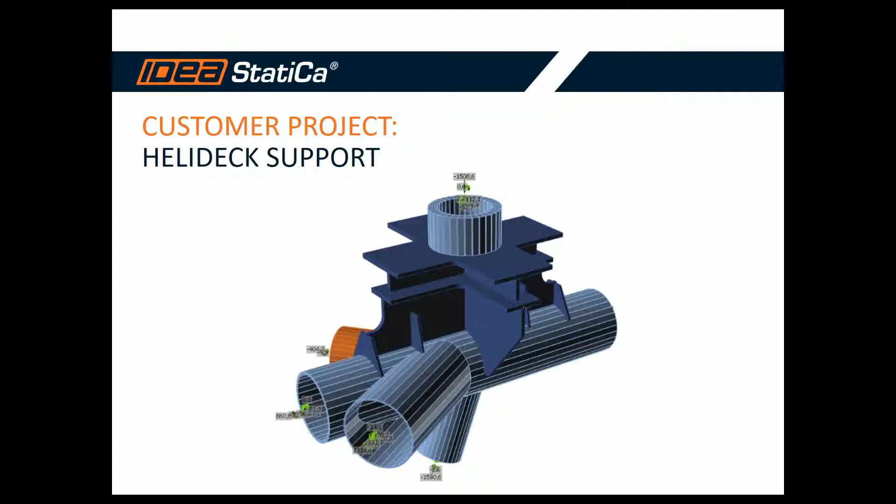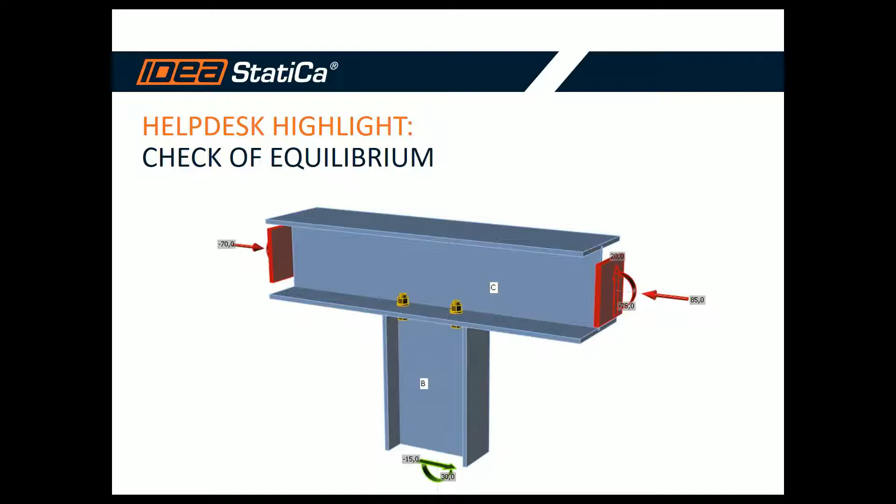So for today, we prepared one customer project that's about a helideck support, this kind of joint. So Lukáš will be presenting you this job. And then about the HelpDesk highlight that we collect on our HelpDesk and process them, help customers to deal with problems. This is one thing about making clear the equilibrium check, if to turn it on or off in the load effects and what are the reasons. This is a very common question in our help desk, so this is why we want to clarify that.

So let's get to the helideck project. This is a project that we got from one of our customers from Italy, who was doing the part of design, the structure analysis of the steel structure. So this helideck is right now still under the design process. It's built by Bayard, and it's a helideck on an offshore structure. So it's made of an aluminium deck and supported by a steel structure, of which part is the steel joint designed in IDEA StatiCa. Diameter of helideck is 23 meters and it's designed for the helicopter AgustaWestland. So that's a very interesting thing.

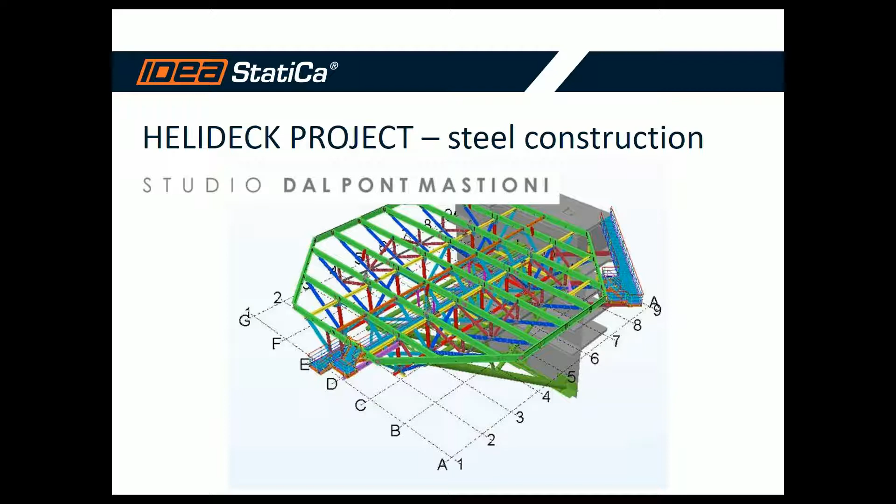This is a Tekla project drawing of the whole thing, together the aluminium part and the steel structure below supporting it. And the Italian office is called Studio Dal Pont Mastioni, and they did the calculation and analysis of the steel structure and all the joints of the steel structure in IDEA StatiCa. Their workflow was, let's say, the nowadays BIM workflow. So they had the drawing of the project in Tekla Structures, then they did the structure analysis in STAAD.Pro, and they exported those models into IDEA StatiCa, where they code checked the steel joints. So nice example of a workflow. This is how we would like to do it.

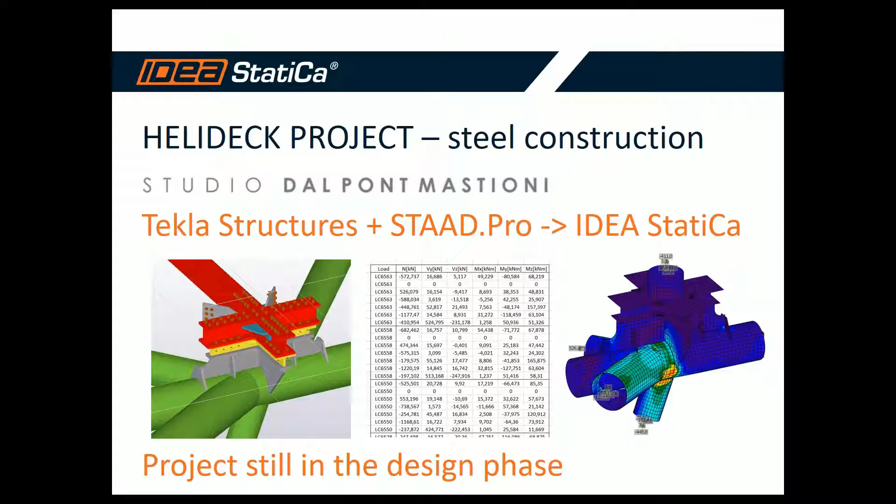And while the project is still in the design phase, we were not able to collect or to show you and to work with the real data. So we have some restrictions, but we'll do our best to show you as much as we can. So now I'll give the presenter to Lukáš, and he'll tell you more and show you part of the workflow.

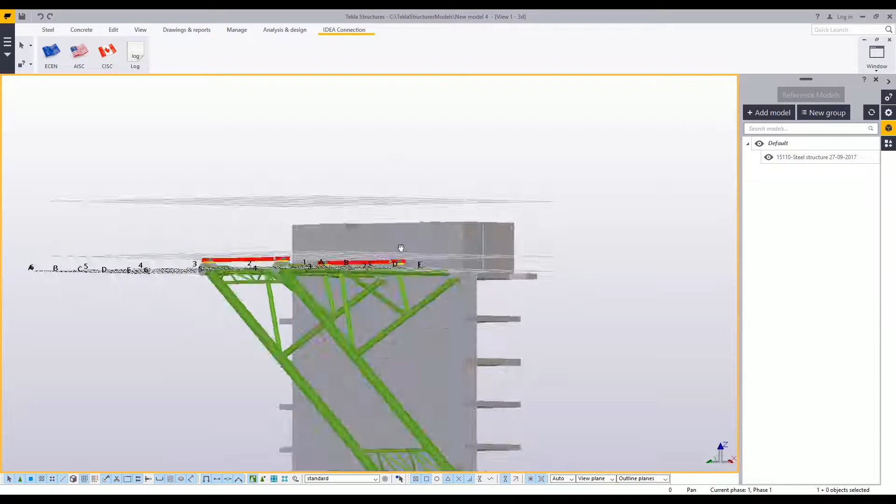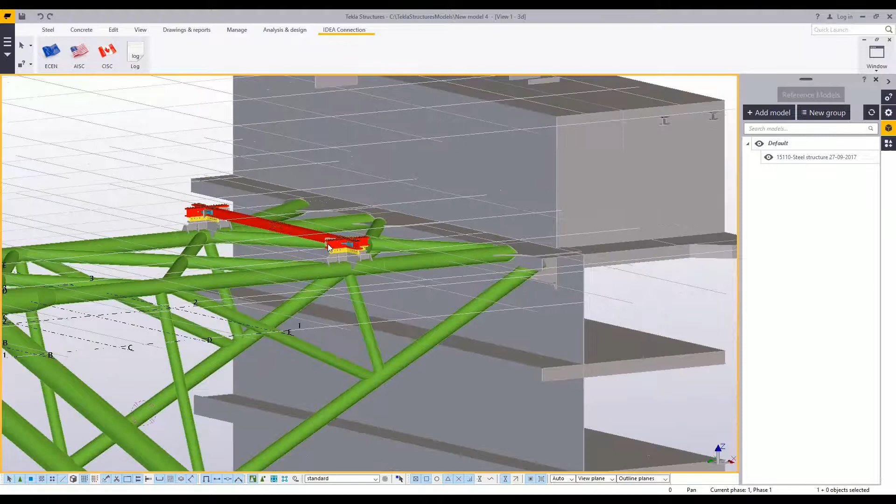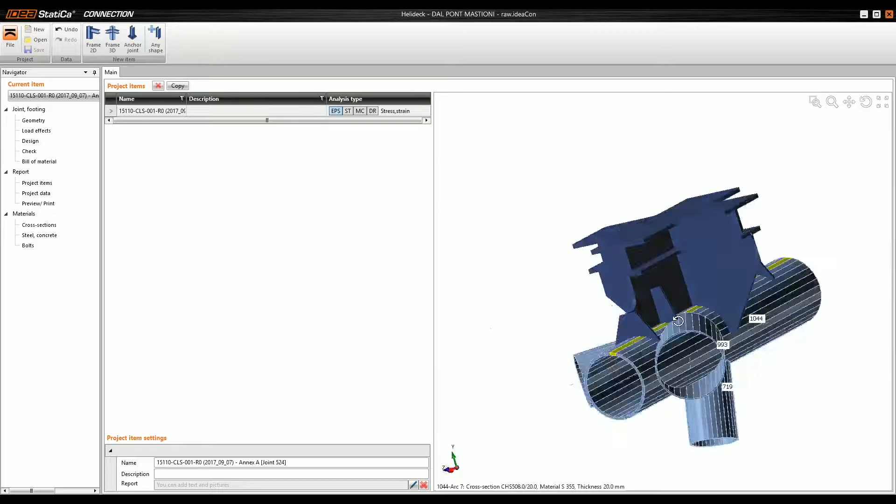So, as Adam said, now you can see only the steel truss cantilever, which is composed from the tubes, and I would like to check this joint. As Adam said, I don't have permission to make the process of the export from Tekla Structures because the project is still in the process, so we don't have permission for that. But we have received a project of the exported joint in IDEA. So I will show you the exported geometry of the joint, which is composed from the tubes or members and from the plates. These are, I can say, stiffening members.

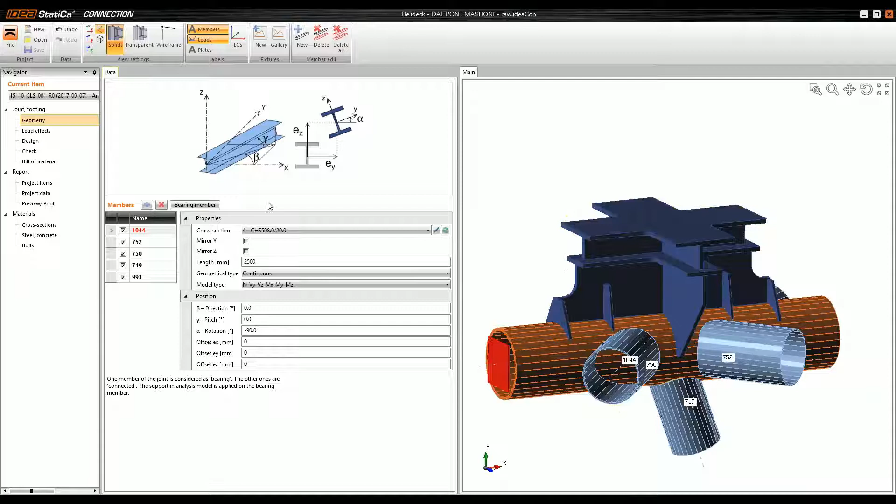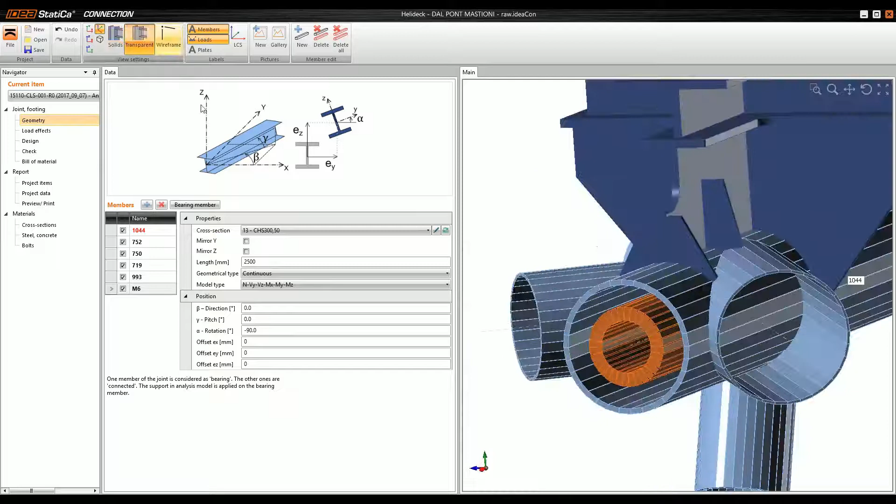Okay, if we have geometry, we need to transfer the load from the upper part of the helideck to the other parts of the tubes, but we need to arrange the load through the stiffening member, which will be added on the upper part of these cross plates. Yes, so I create a new member. You can see the member will be the tube. The diameter of the tube will be 300 millimeters and the thickness 50 millimeters. Now you can see the tube. I will just switch on the transparent view to see the tube, and I change the length of the tube to 300 millimeters and inclined about 90 degrees.

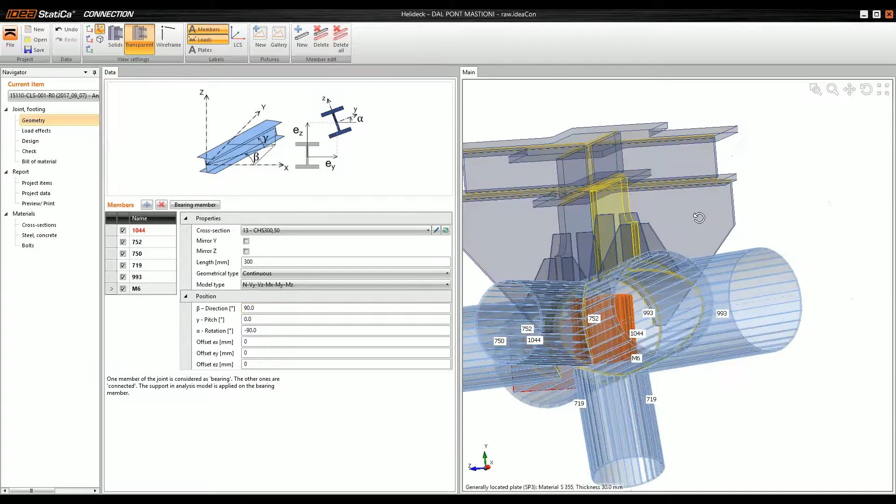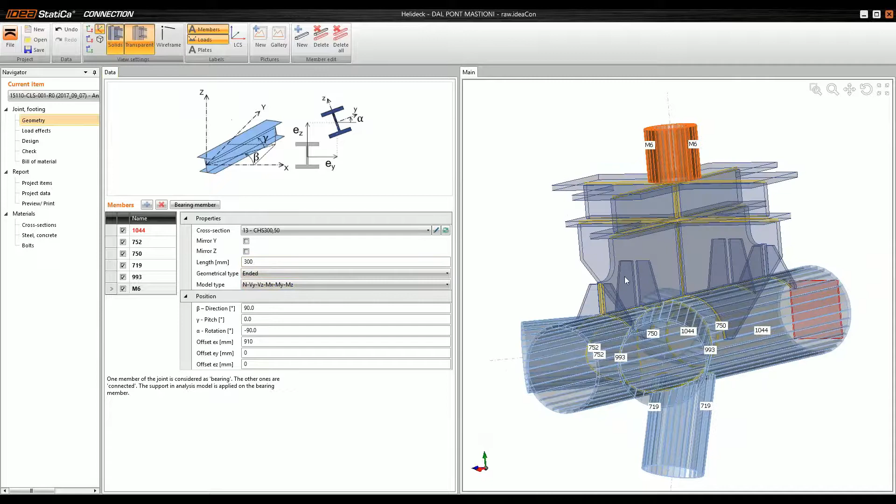Okay, and the last step, I need to move this tube to the upper part of this cross plate, about 910 millimeters. And I need to change the geometrical type on the end. Okay. Now you can see I have a stiffening member which will transfer the load from the helideck to the steel structure, or to the steel joint, which I would like to check.

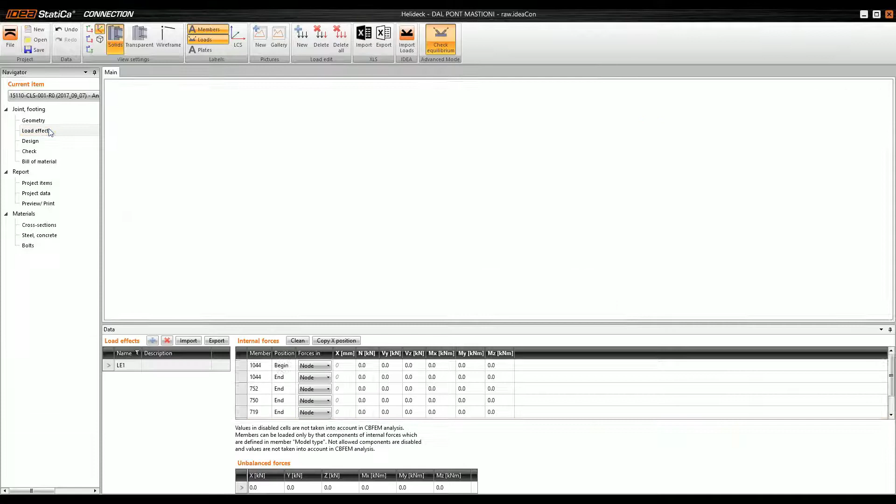Okay, so now I will continue to the load effects. And in the load effects, because we have received internal forces from STAAD.Pro, I will import the load cases from the Excel sheet. Here you can see many load cases or load combinations which I would like to check, but to speed up, I will pick only one. For example, only this combination.

This one, and I will perform only copy and paste to this step and give OK. And you can see the internal forces were automatically uploaded from the Excel sheet to the relevant members.

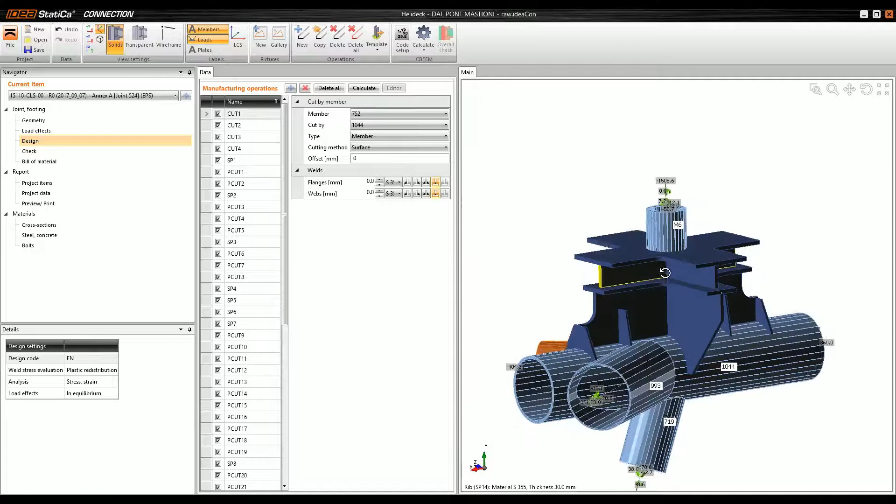Now I can go immediately to the design, and in the design I need only fix this bottom part of the tube to this cross plate. So I will use the manufacturing operation weld or contact. I would like to make a weld in this bottom place. The member is member M6, so I will choose member M6, and the plate, this is the plate SP14.

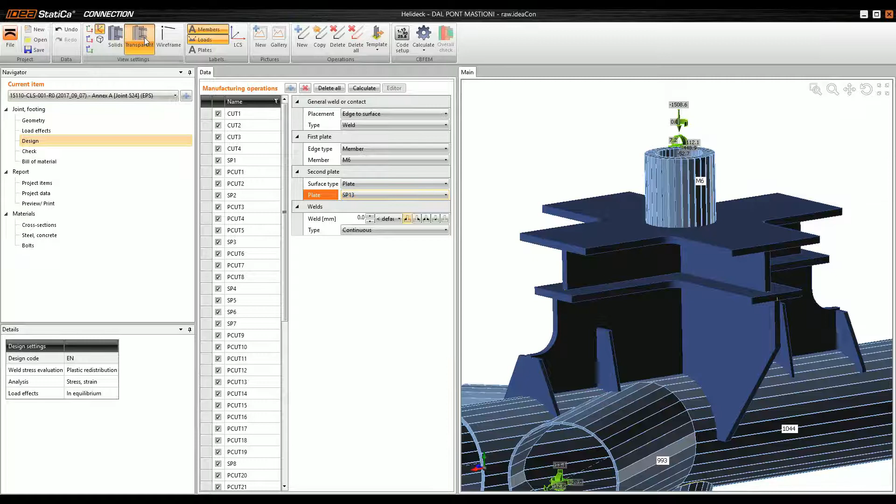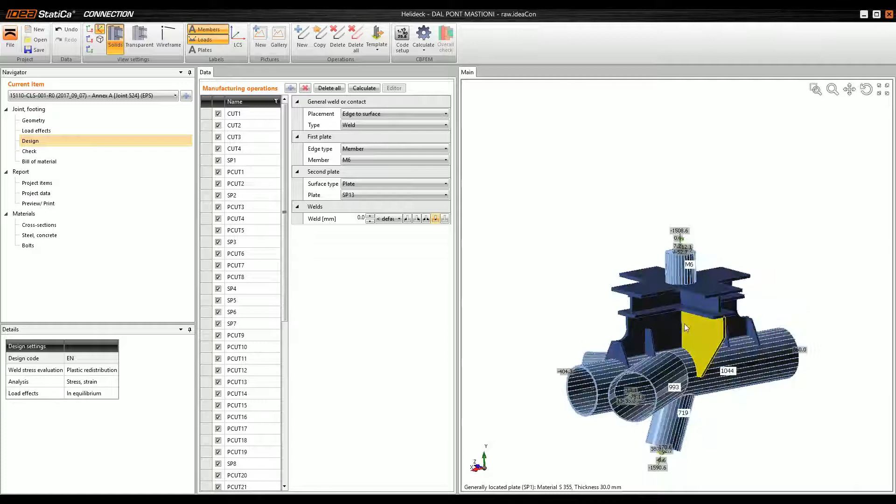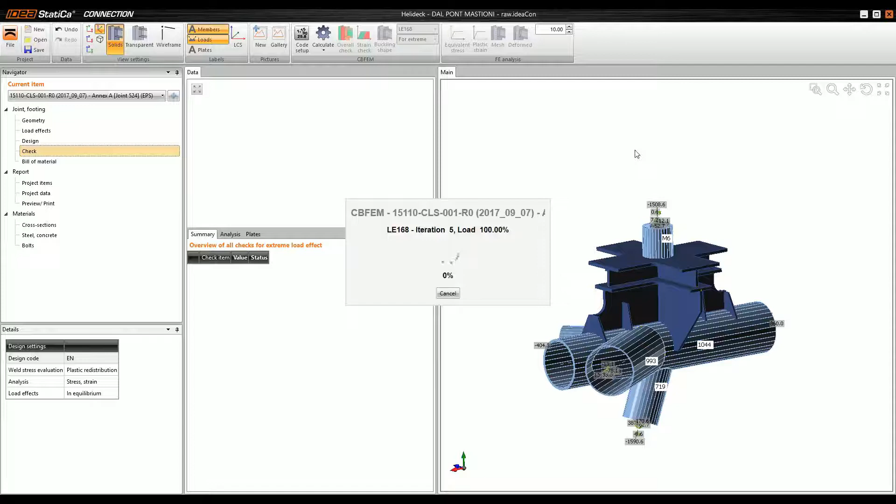And if I give a transparent view and switch on the butt weld, you can see the weld was created around the circumference of the tube. Now I have finished the modeling, because the operations were automatically exported from Tekla to IDEA. You can see there are many manufacturing operations in this joint, and I can run a nonlinear analysis. It will take a few seconds because it's a difficult type of joint.

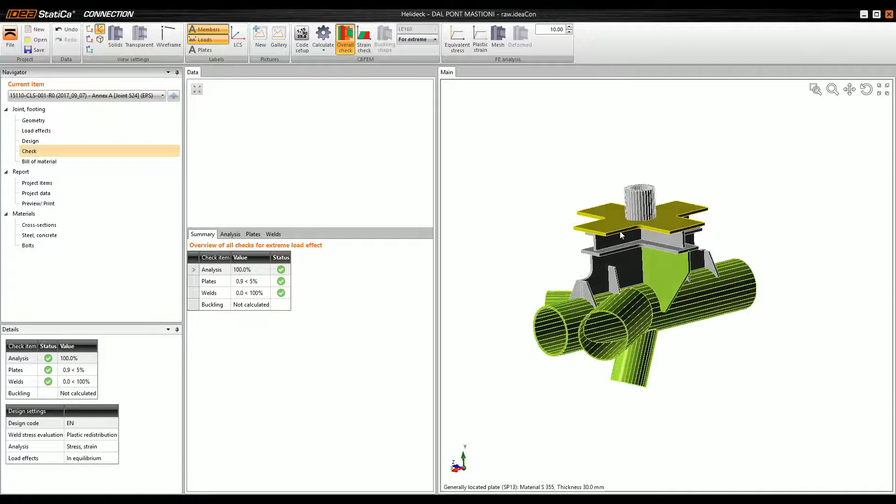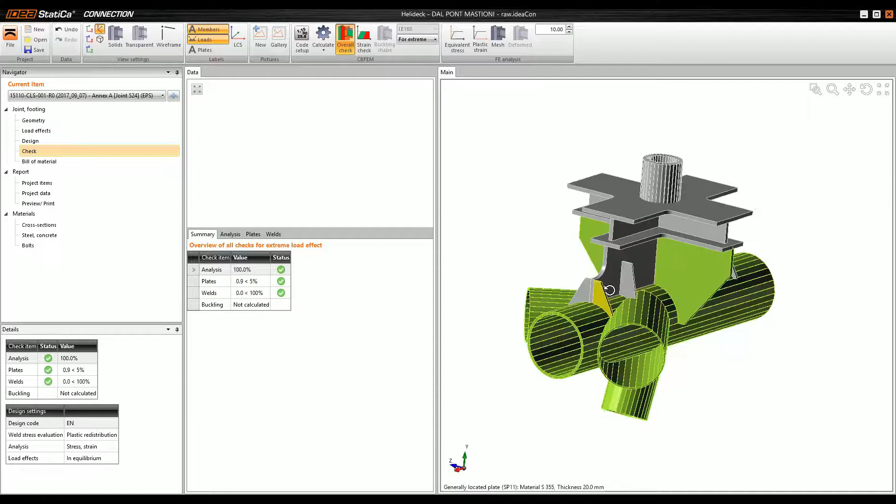And now on the first view you can see traffic lights. With the different colors on the joint, you can see the utilization of each plate, bolt or weld. Up to 60% utilization is gray, up to 90% is green, and over 100% is red, and we don't have any red color.

In the left part of the window, in the summary, we can see an overview for the plates, welds, and bolts, if they are included, and the utilization. I will continue to the plates, and in the plates we can see the item, material, the strength of the material, thickness, loads which are applied, and the maximal equivalent stress, and plastic strain as well.

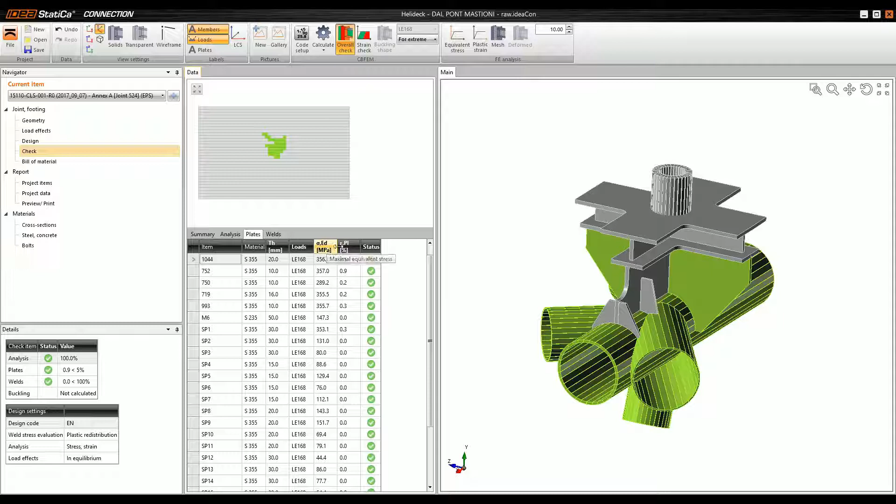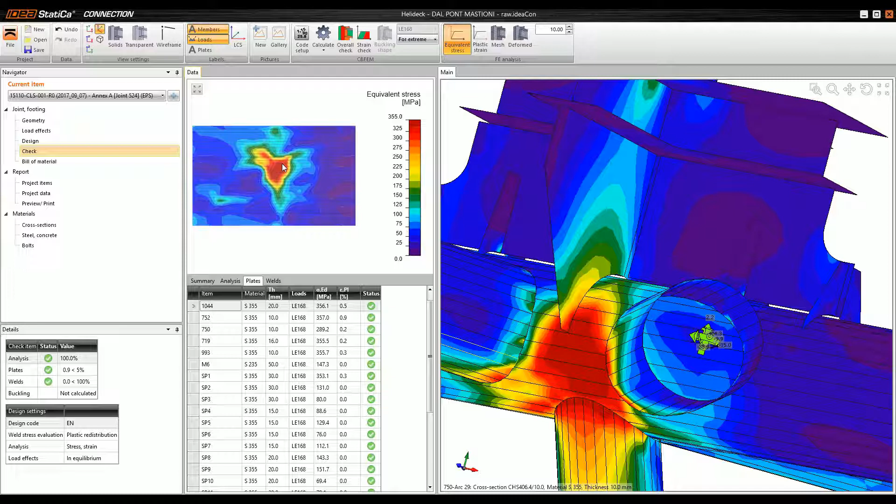So I will switch on equivalent stress to see the redistribution of the stress on the joint, and you can see the most subjected part of the joint, which is this part. If I click on it, this tube is wrapped out, and you can see the place with the maximal stress on the tube. If I switch to another part, it is displayed in the left window, and you can see the redistribution of the stress through the surface.

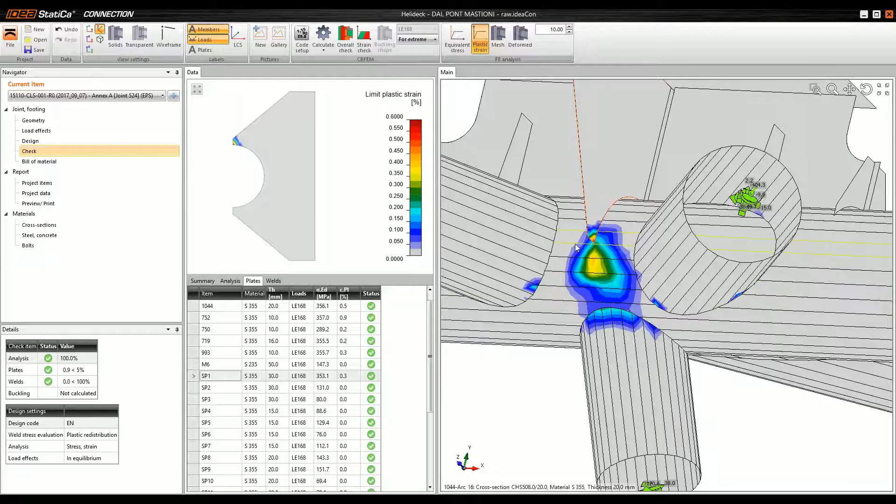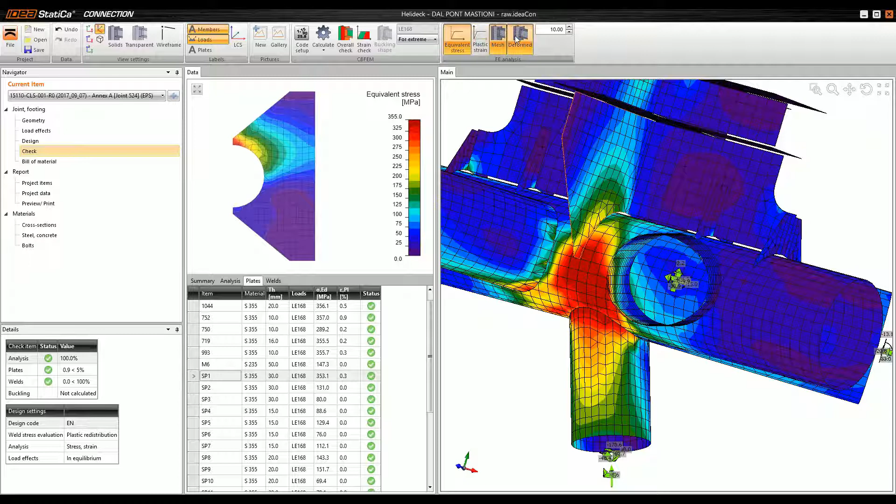Okay, now I will show you the plastic strain. Here is an area of plastic strain where the plastic branch is reached on the diagram of the steel. So if I switch again to the equivalent stress and turn on the mesh and deformed shape and change the scale, you can see how the joint is deformed.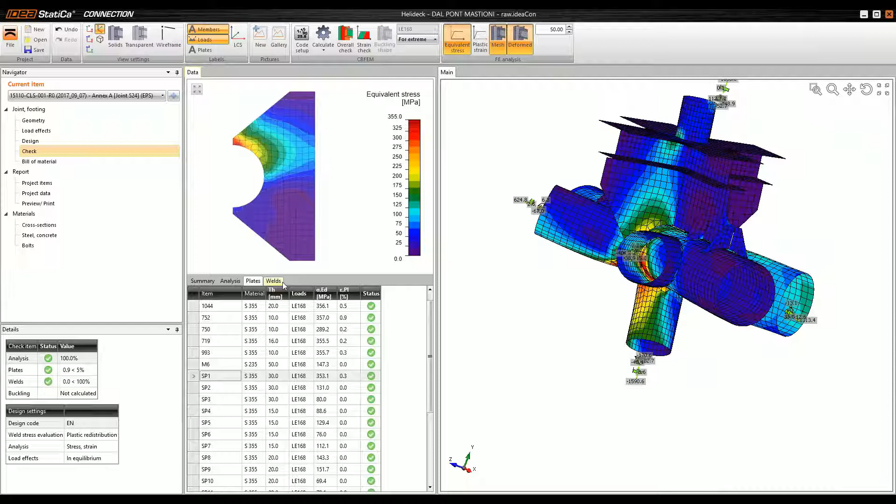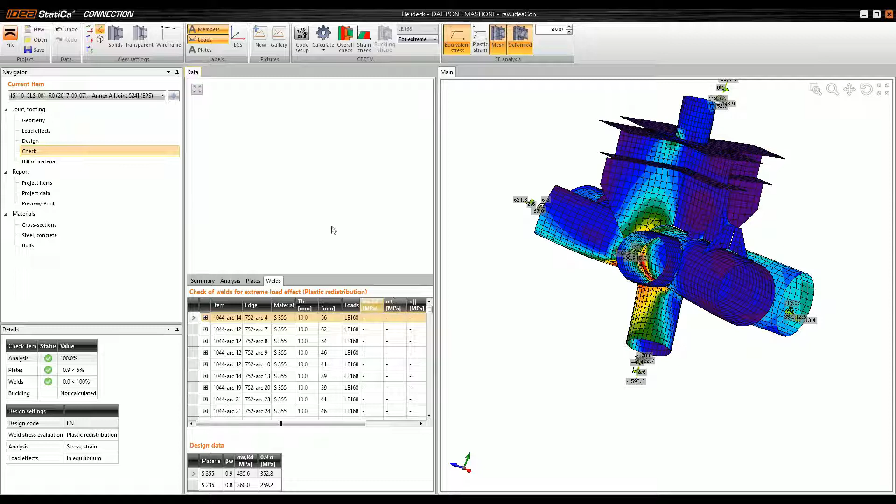So now we can proceed to the welds. Every weld on this joint is created from butt welds. It will take a few seconds because there are many butt welds. You can see that the equivalent stress or stress perpendicular to the throat is not included, because we consider that the butt welds have the same strength as the connecting member.

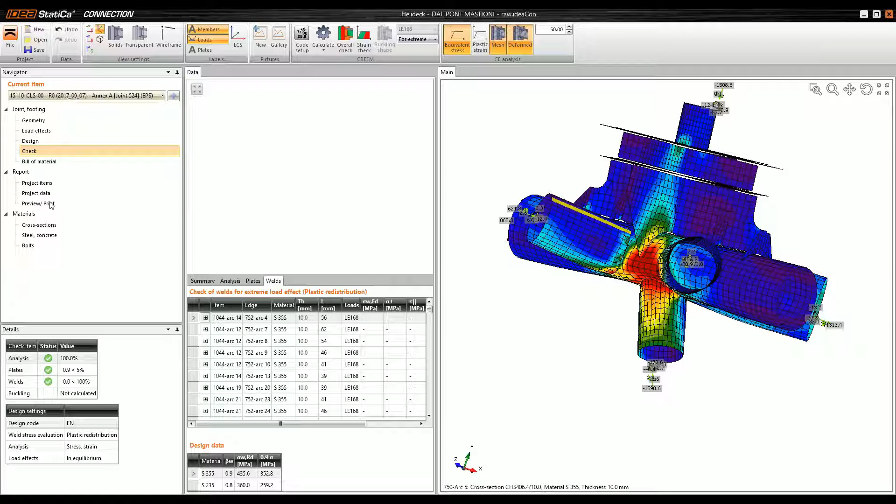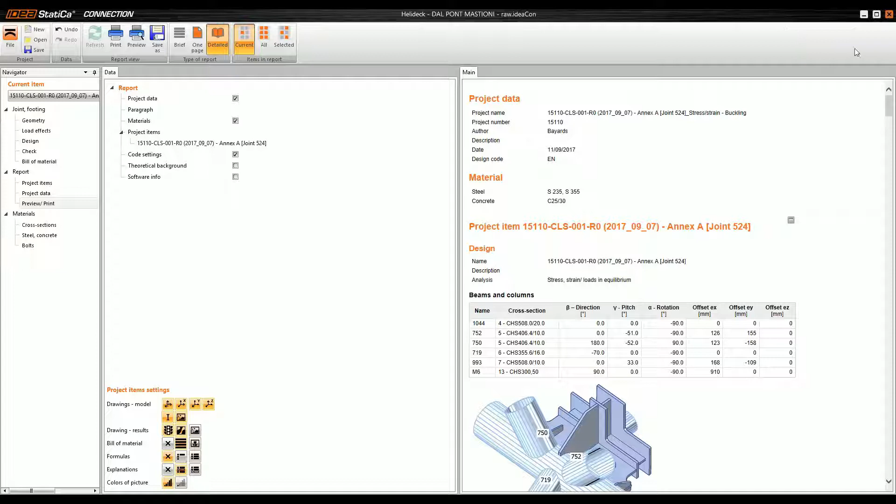Now I will proceed to the print preview, to the report. It will take a few seconds. Here in my report I can set whatever I want, for example, drawings, all results for the drawings. So I will refresh. It will take a few seconds. Okay, and now we can go through the report.

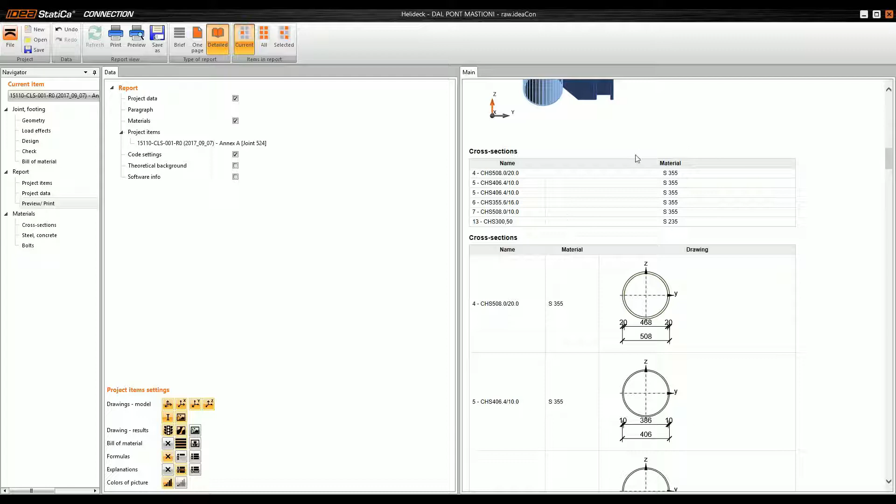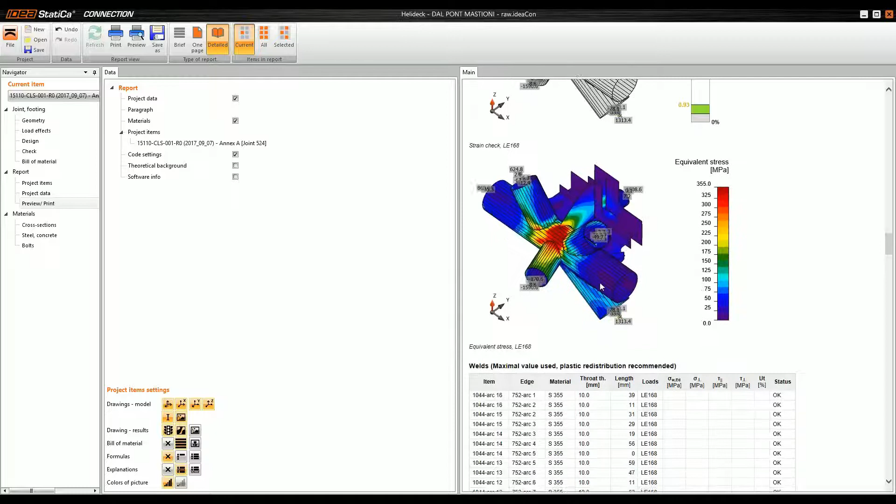You can see the geometry, axonometry, and every view, like front view, side view, the cross sections which are involved in this project, the strength of the material, load effects which are involved, and summary of the check, each check for the plates and traffic lights, strain, stress on the plates, and the check of the welds. It's a long list of welds.

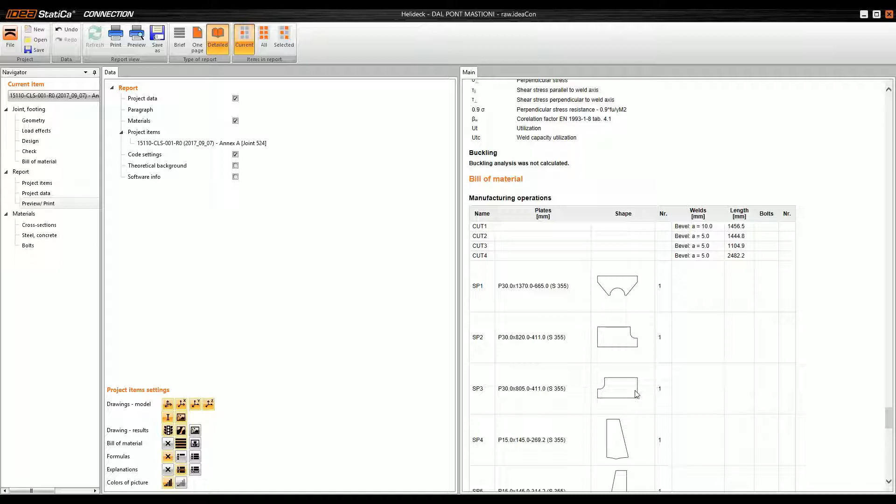Okay, and in the bottom part you can see a bill of material and the shape of the separate components of the joint. And here are only code settings.

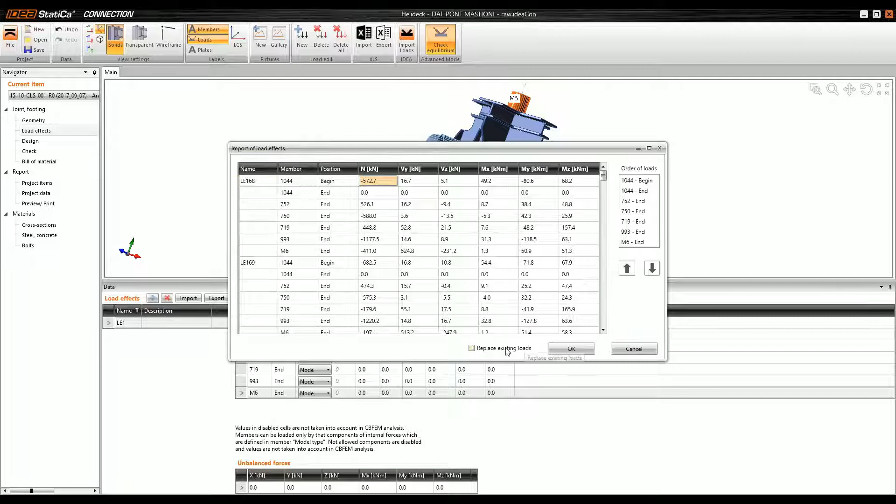I would like to show you, if I come back to the load effects, that we can upload everything. If I delete this one, I can upload all 27 combinations from Excel, only copy and paste to the load effects. You can see now. I will give OK. It will take a few seconds.

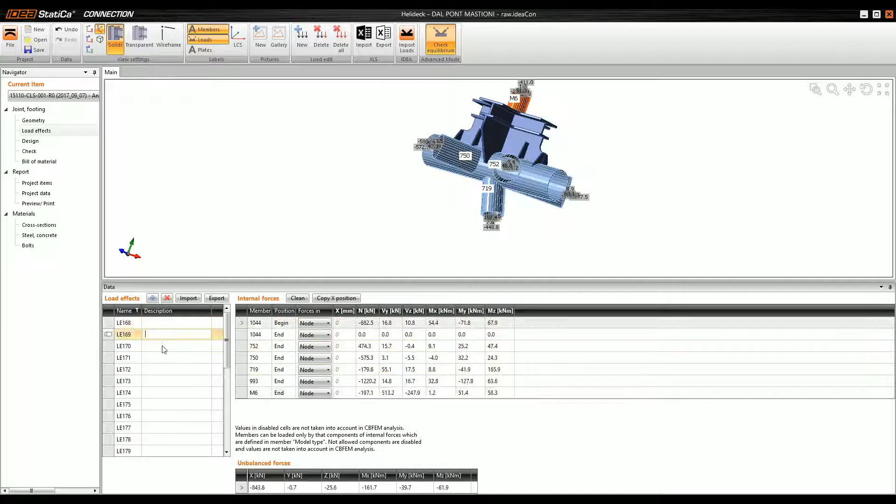Okay, and now you can see the combinations from the Excel sheets, which were exported from ETABS, are involved in this step for every member on the joint.

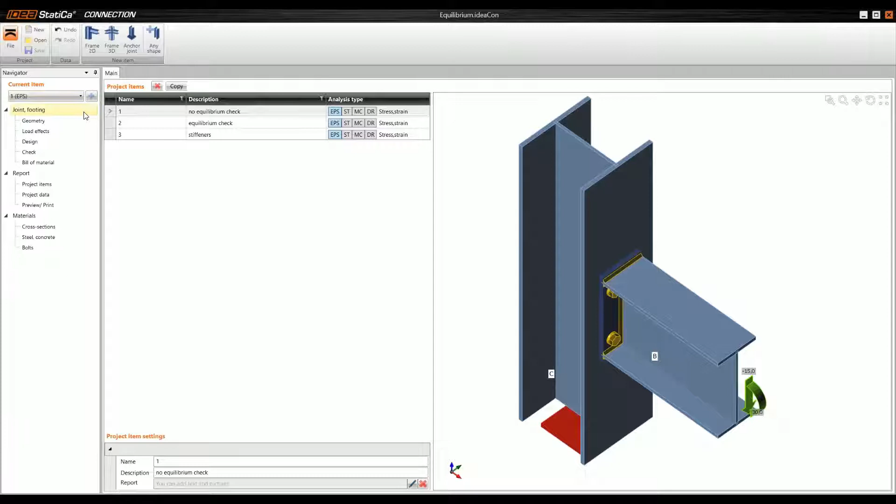Let's discuss the check of equilibrium. I have a very simple example, just a beam bolted to a column through an end plate, and the thing we're talking about is this check equilibrium, whether to switch it on or off.

That's the advanced mode, let's say. By default this is switched off, but it's a very important thing everybody should be aware of, because simply said, this should always be switched on, and you should always be aware of having equilibrium here.

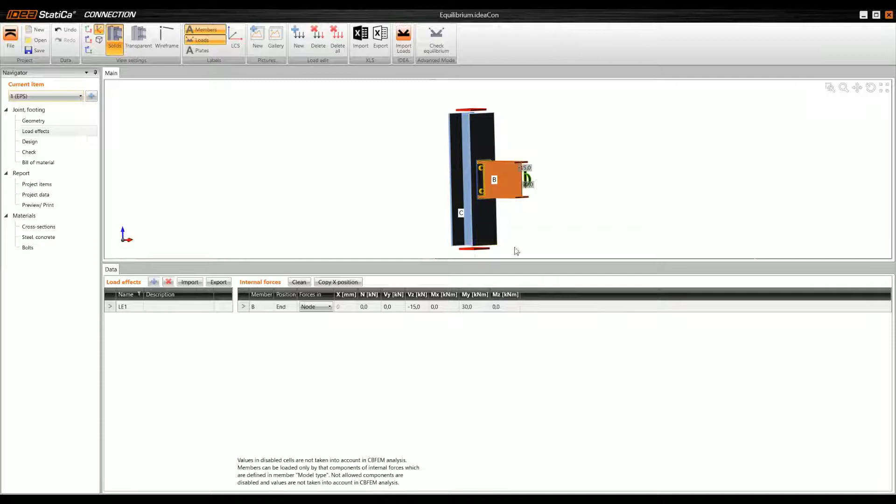So let's get to the explanation. I have three project items here for comparison. The first one is the default, or the simple one. One beam is loaded with a moment and a shear force, and this is very simple.

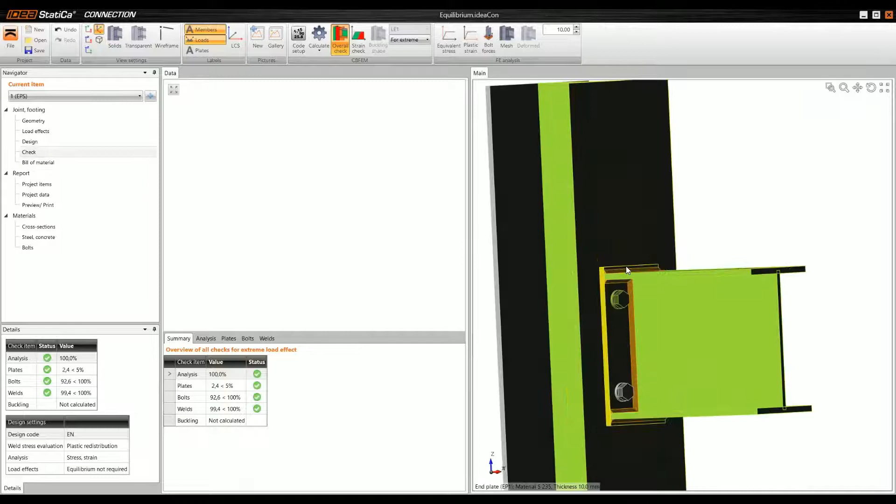We can check that, calculate the result, and see what happens. This is fine, we've calculated with code checks, and this joint satisfied the criteria. We are very close to the limit, but still on the safe side. Everything is fine, good. So this is one option, right?

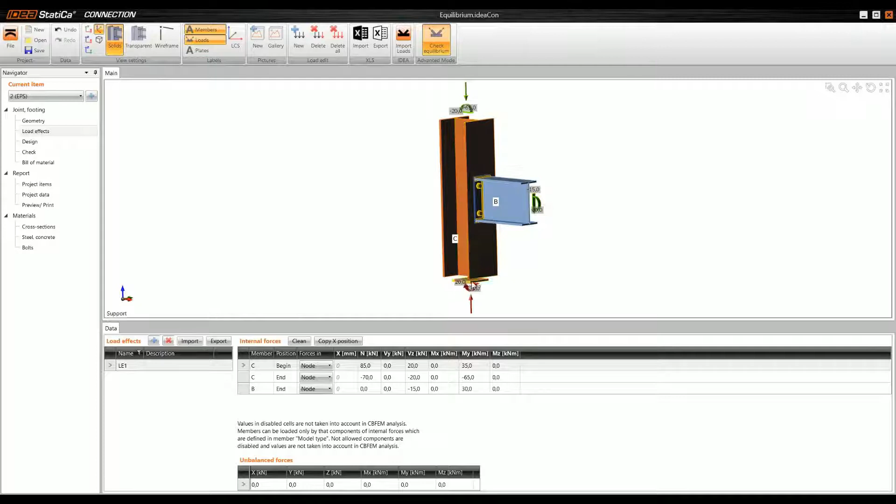Then if we go back to load effects — that's the second project item — the same example, but now I've turned on the check of equilibrium, and I added some forces in the column that I get from a structure model. We can turn on the wireframe view to see the forces. So this is now assuring that we calculate the joint also with the transferring forces in the column — we're also calculating the stresses in the column from those forces.

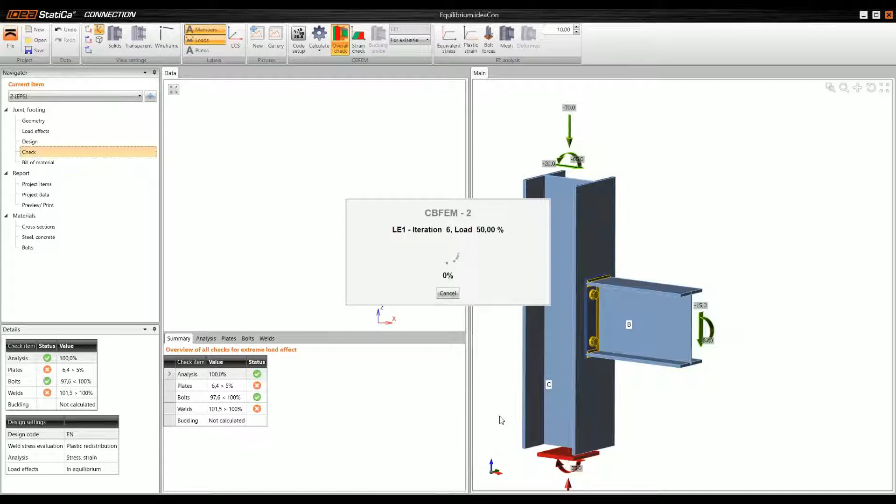So this is all in equilibrium, because it has to be in equilibrium if you have the right results from a structure model. Now let's take the same example as the first one, and if we calculate this now, what we get is that we didn't satisfy the code check. This is red, it failed the code check, so the design is not fine.

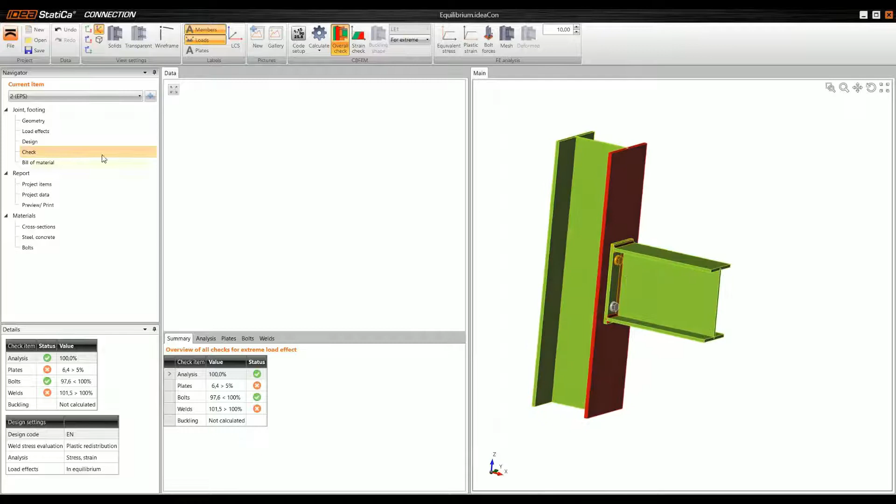So that's the difference, and it's obvious only in examples when the utilization is very close to the limit, but it can affect the outcome of the design or analysis in IDEA StatiCa. So this is very important to mention.

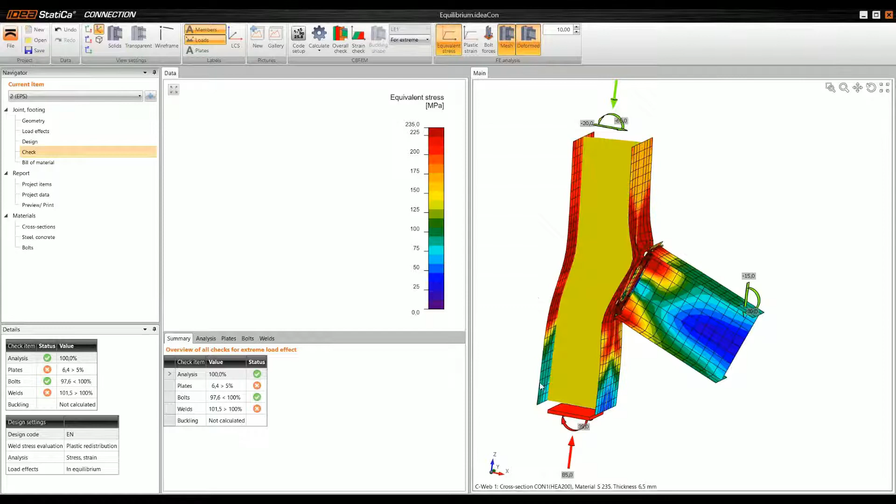When we check the results now — equivalent stress, mesh, and deformed shape — we can see the deformation occurring here in the column as well, and still the column is held on the top and bottom, because it's supported somewhere upwards and downwards here.

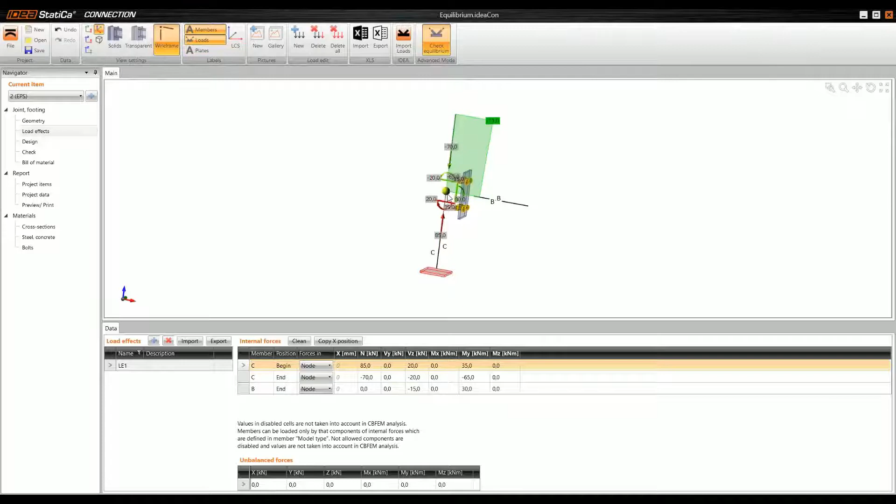So this is one thing, and then we sometimes get emails on HelpDesk saying there is no equilibrium here, and this is always because of a misunderstanding — because here you implement the nodal forces from this node from the structure model. Since you have a structure model calculated for various combinations and load effects, the practice in some countries is that the structural engineer who designs and checks the joint gets extreme forces from all the combinations all together.

So then it's a mixture of each component of the internal forces — for example, you have a moment around the y-axis from combination 3, then a shear force extreme from combination 5, and so on. So you get one table, one set of forces, that you input into IDEA StatiCa, and what you get is that it's not balanced, and the code check is also not right, because it's confused.

How it should be done is that you take all the combinations, all the load effects, input them all into IDEA StatiCa, and let them all calculate. So you have each combination, each load effect in equilibrium, and IDEA StatiCa calculates all of them and shows you the overall extreme from all of them.

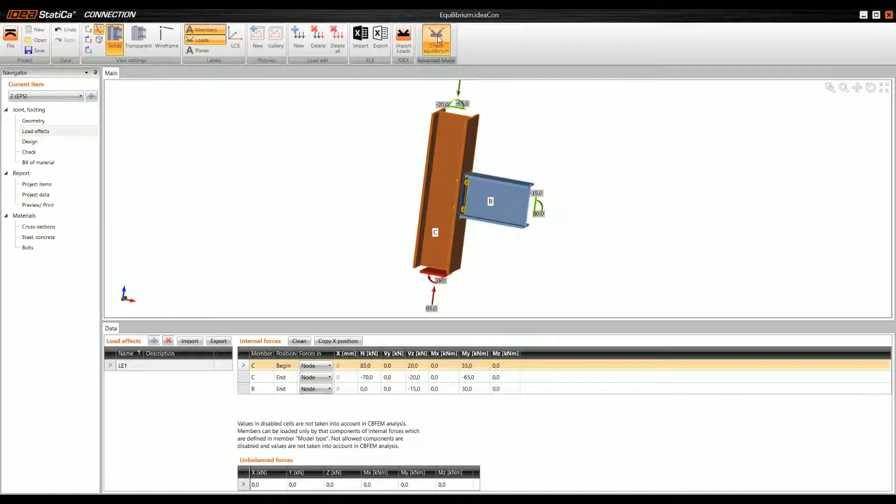So this is the right way to do it, and the right way is to check the equilibrium on, because then you're assured that you're also calculating the forces in the supporting member. So you avoid underestimating the state of stress and strain at the place of the joint.

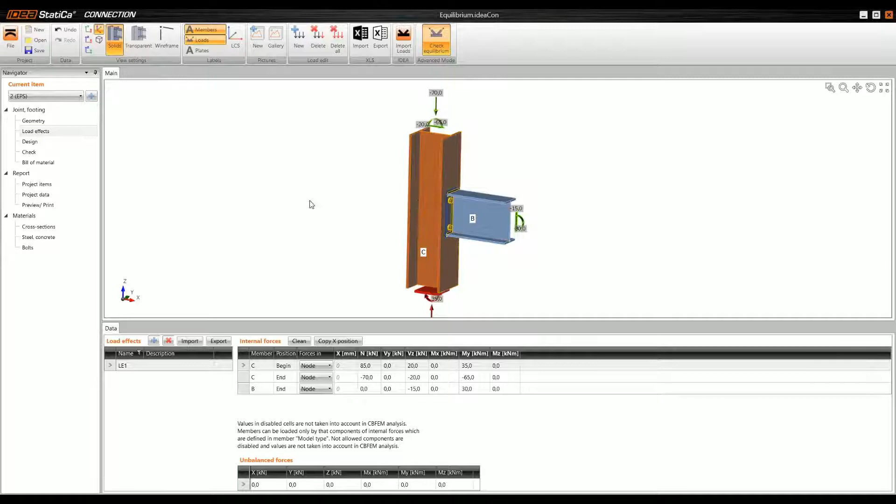Then, of course, you can fix this easily by, for example, adding some stiffeners here. Let's say I have it already calculated — I added some stiffeners, same forces, and I passed the code checks.

So the message of this is to always check the equilibrium on, and don't confuse forces from various combinations and load effects.

Okay, there is a question — let me read that. Why are there no code checks and no formulas visible for the welds in the first project?

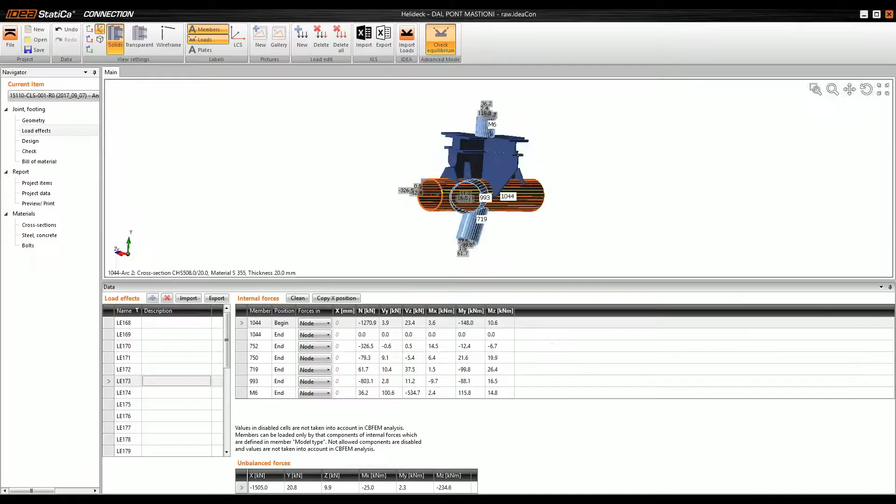So I hope you will see my screen. Why don't you see the check for the butt welds?

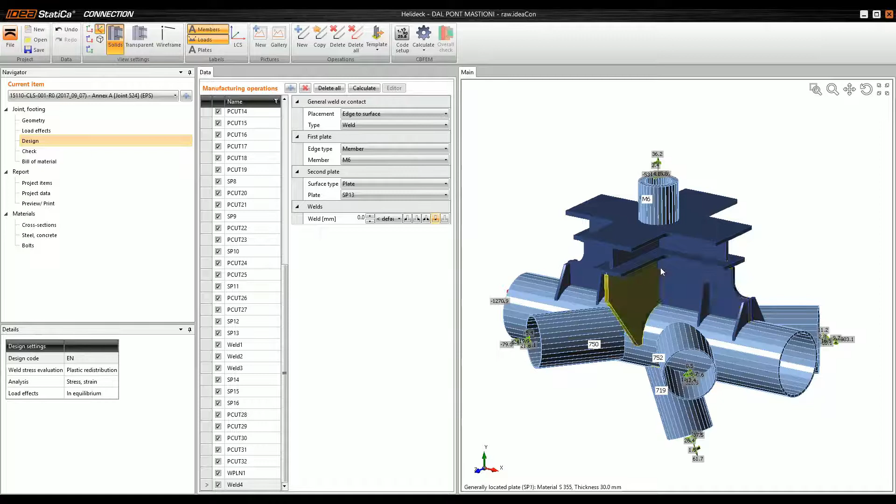Because for butt welds, as you can see in the manufacturing operations, you can add them here, but you don't have the possibility to add a value for the welds, because we consider in our model that the strength of the weld is the same as the strength of the connecting material. So the check is performed for the plates, and the welds are not included due to this fact.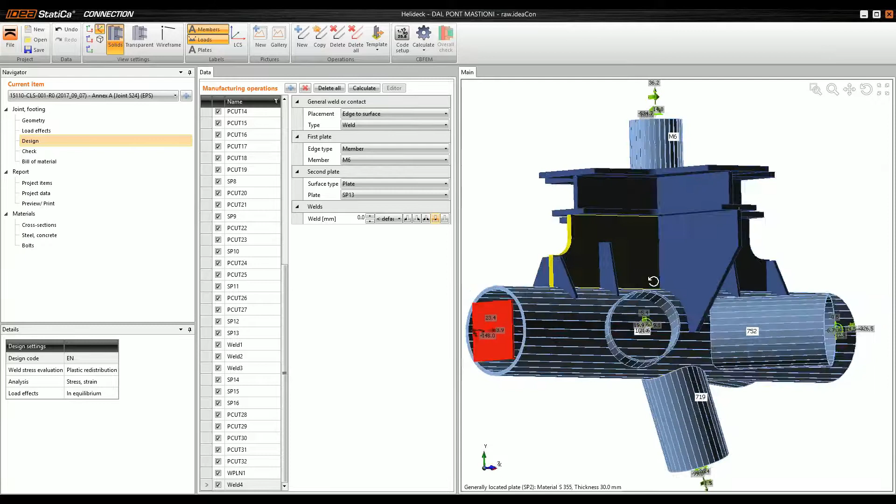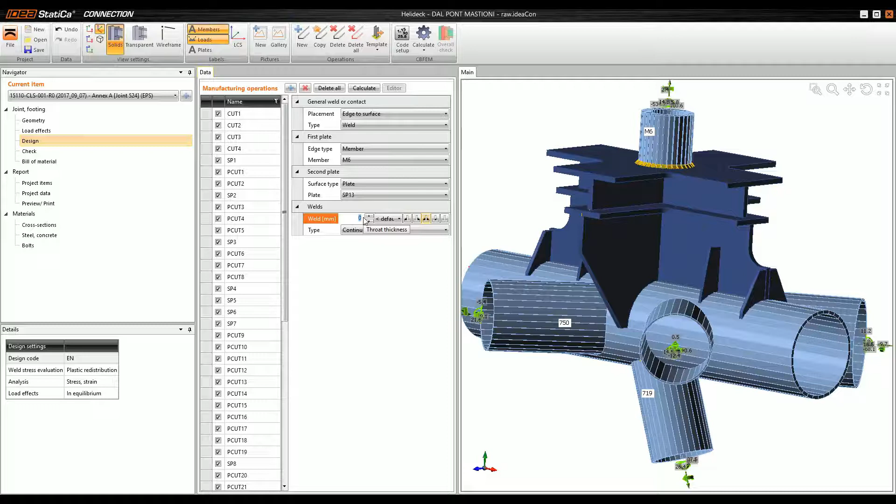We consider it a fully welded weld. If you would like to check the weld, you need to switch on the other type of weld - double fillet weld or one-side fillet weld - and input, for example, 5 millimeters. Sorry, let's say 10 millimeters.

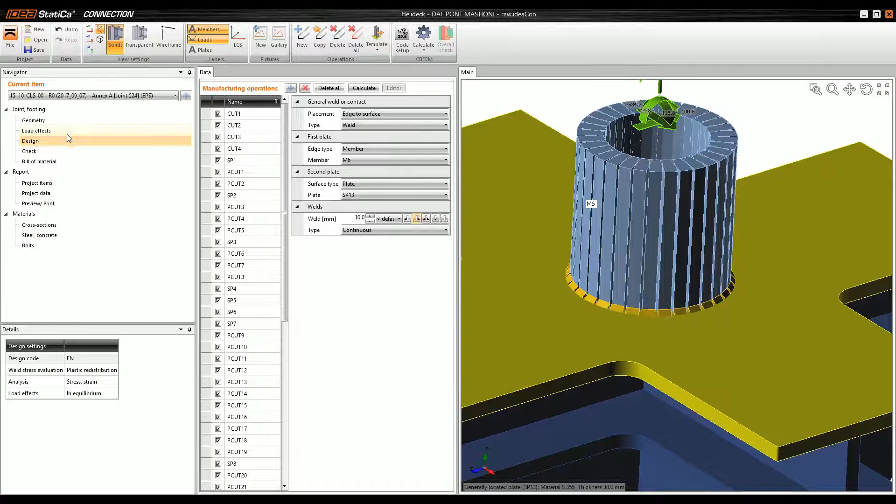Now you can see that the weld is visible. If I run the analysis, I'll go to load effects and delete them to speed up the calculations. It will take a few seconds - give me a moment and I'll show you the results.

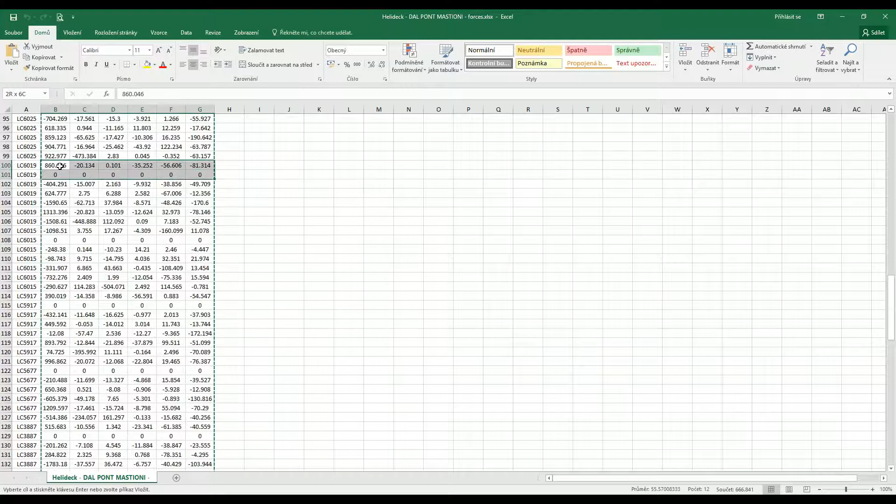Okay, now... sorry. I need to input the load effects again from my combination. I'll do a copy paste - I import the load as before, and I can go immediately to the check and run the analysis.

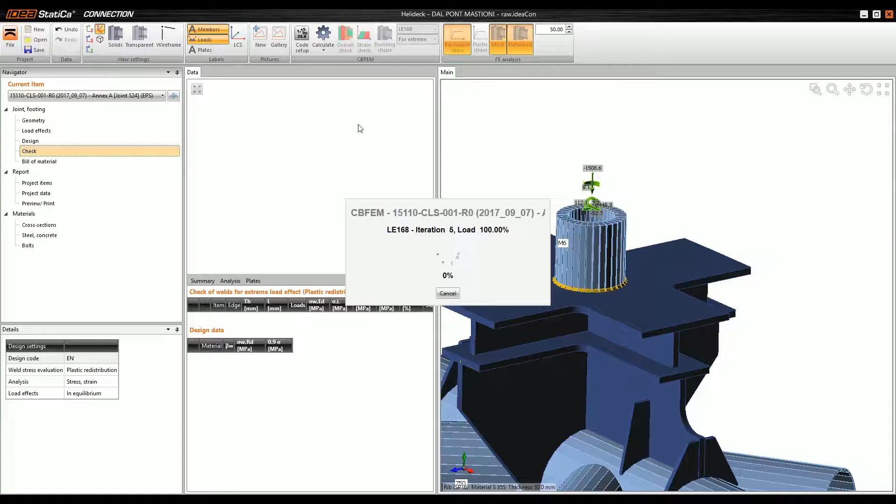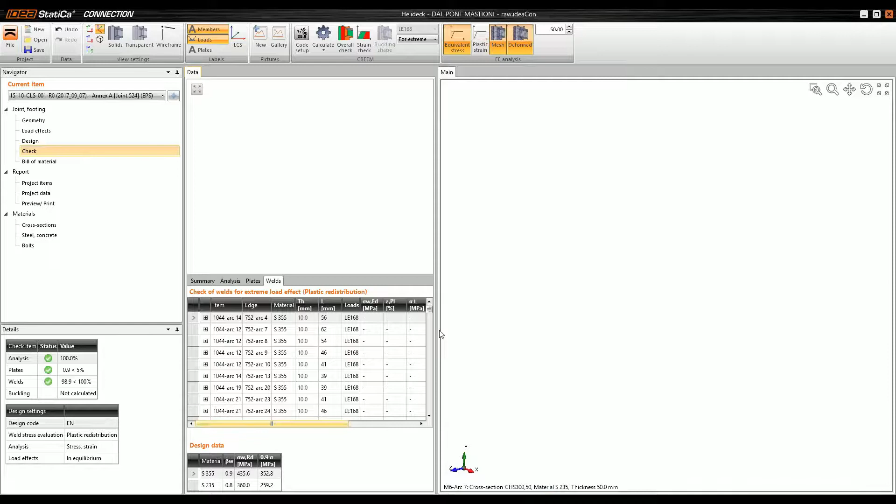Now I hope you will see the check for the welds. It takes some time. Okay, now I need to find... I need to switch off the deformation. Okay, let's go through the overview of the check.

You can see here is a weld, and if I click on it, here is the redistribution of stress around the whole length of the weld, and you can see the equivalent stress - this is von Mises stress and plastic strain - for example the stress perpendicular to the throat, stress parallel with the throat, and shear stress perpendicular to the throat. From these three stresses, this equivalent stress is composed.

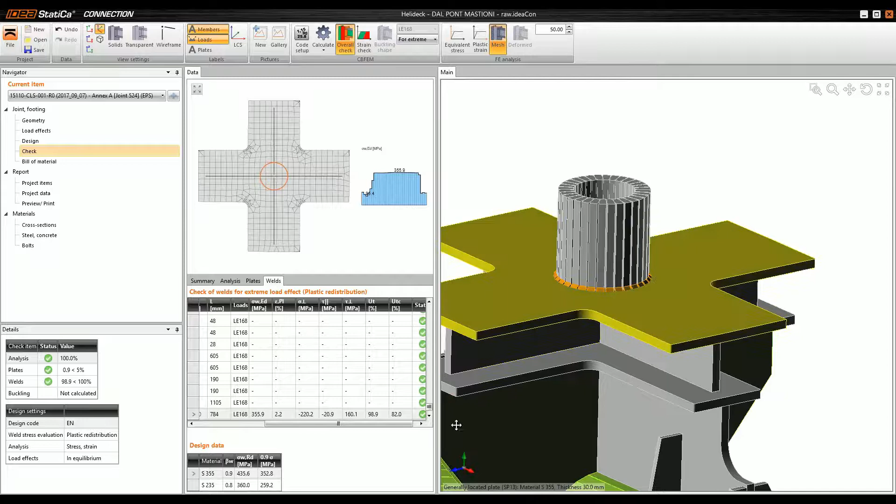And here you can see the utilization - this is about 99%. For this type of weld we have a check in compliance with the Eurocode, and you can see the value here. I think that's all for the explanation of the welds, I hope.

So Adam, if you have another question, can you give it to me, or should I give you the presenter role? Yes, maybe I can answer one.

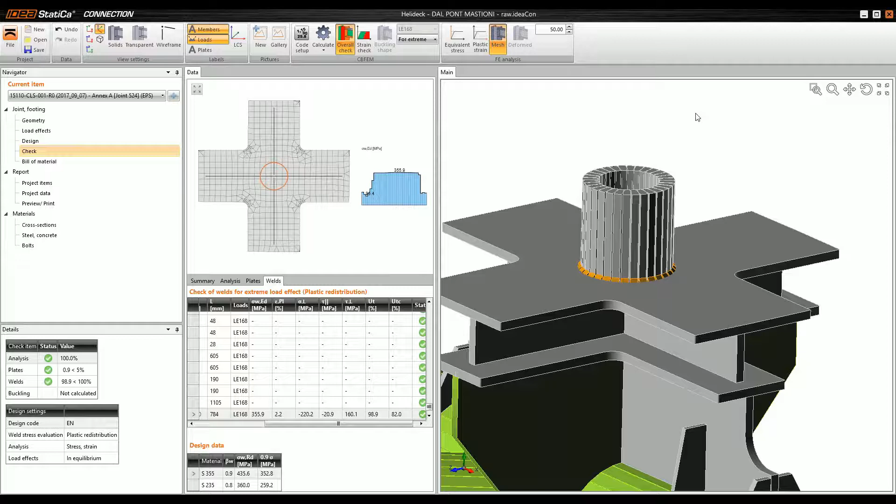There is one question about exporting to DXF. I can maybe show that. There's a question: why can't we export a 3D DXF file from IDEA StatiCa? We can't do it now - this is under development, so we are working on that currently. It will be available in a future version, so you will directly export DXF from the software. But for now, we've just launched...

I'll show you - switch presenter to me, let's show you. Go to our web page. We have an online viewer from which you can export to 3D DWG. So you go to our web page, ideastatica.com, then to cloud. Here we have two things for now: the online cloud code check application and the online project viewer. This is all for free, and you can load any project here - for example, the one I was showing you.

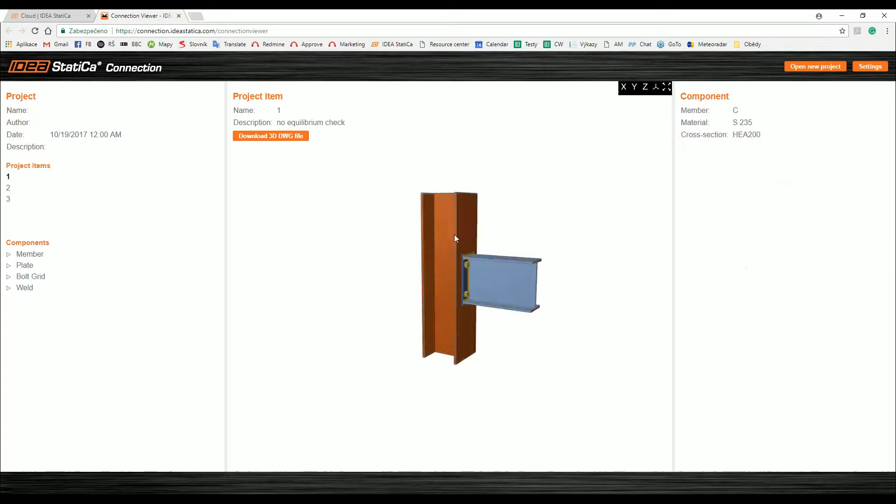And in this viewer, you can go through all the parts of the joint. You have the drawings here, everything is described. This is very useful for checkers of design in some countries, and you can browse the whole model, see what everything is there, how it's built, the thickness of welds, etc.

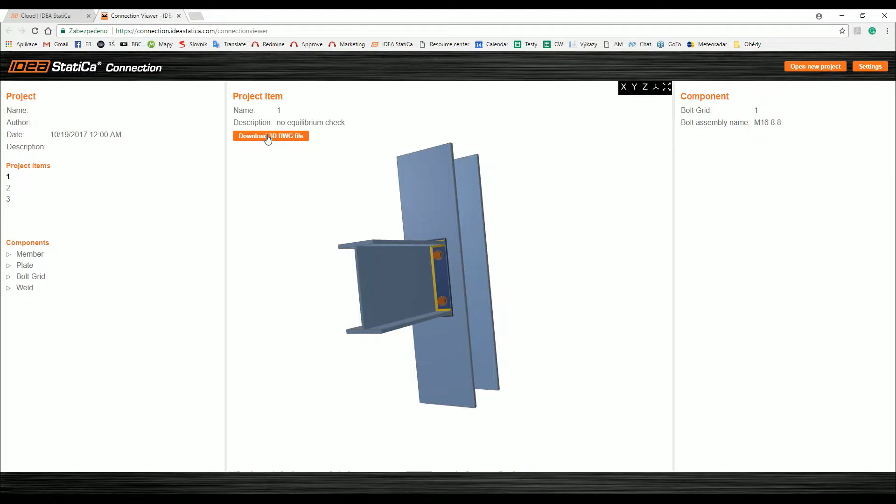And here is the function that lets you download the 3D DWG - it just creates the model and you save it wherever you want, and this is how it works. It takes a few seconds because it's on our server, and from this you can then directly open it in ACAD software.